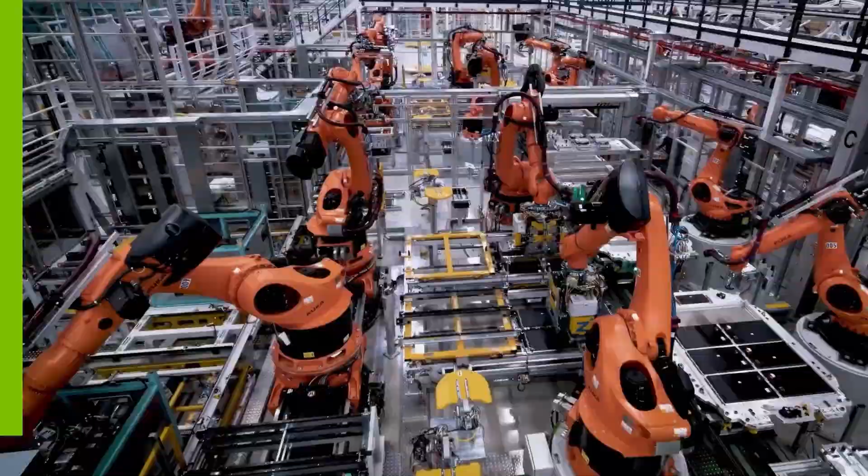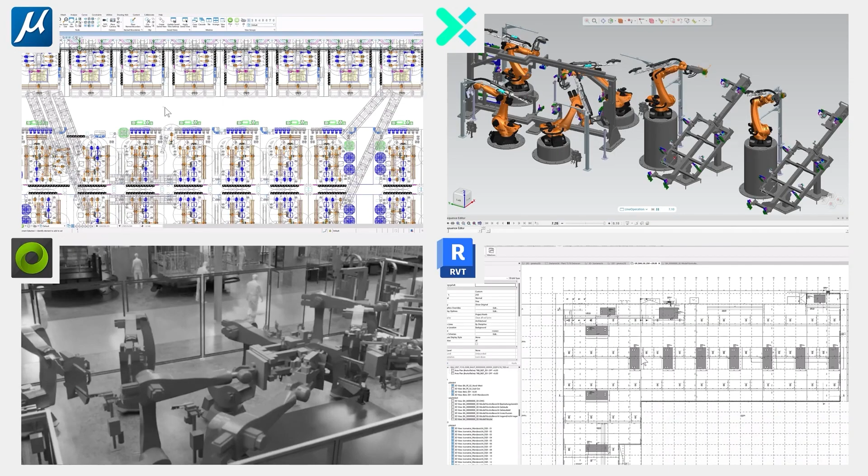There is a factory in Debrecen, Hungary, that BMW built twice. Once in the real world, with real steel and real concrete and real robots bolted to real floors. And once before that, entirely inside a computer, where nothing was real, nothing was physical, and nothing could get hurt if it went wrong. BMW built the entire factory as software first, tested it, broke it, fixed it, optimized it. Ran thousands of versions of it, and only once the digital version worked perfectly did they pour a single ounce of actual concrete in Hungary.

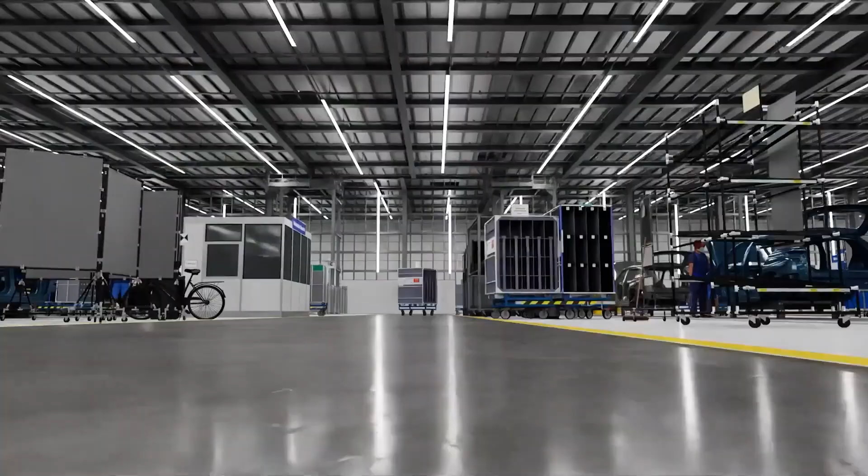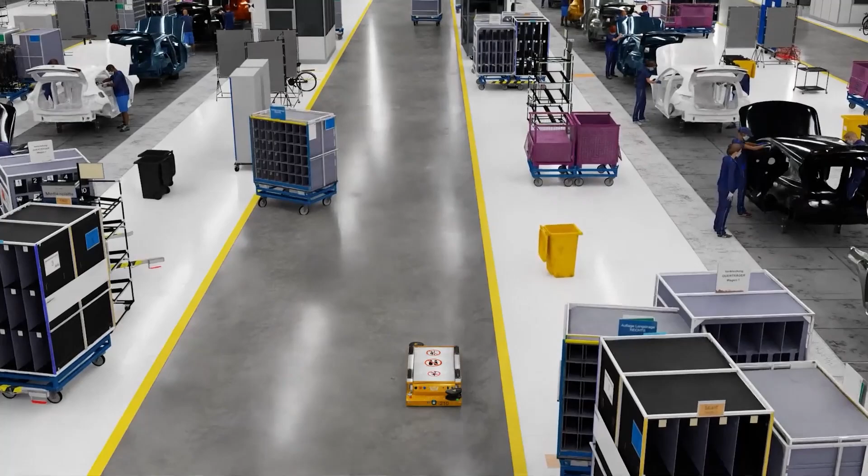That digital version is called a digital twin, and it lives inside a piece of software called NVIDIA Omniverse. And BMW is not the only one doing this. Right now, in 2026, some of the biggest companies on Earth are trying to do something that sounds like science fiction. They are trying to build a complete digital copy of the physical world - cities, factories, weather systems, even the entire planet's climate - so they can test what happens before they risk anything in reality. This is the story of the race to simulate Earth before anyone dares to change it.

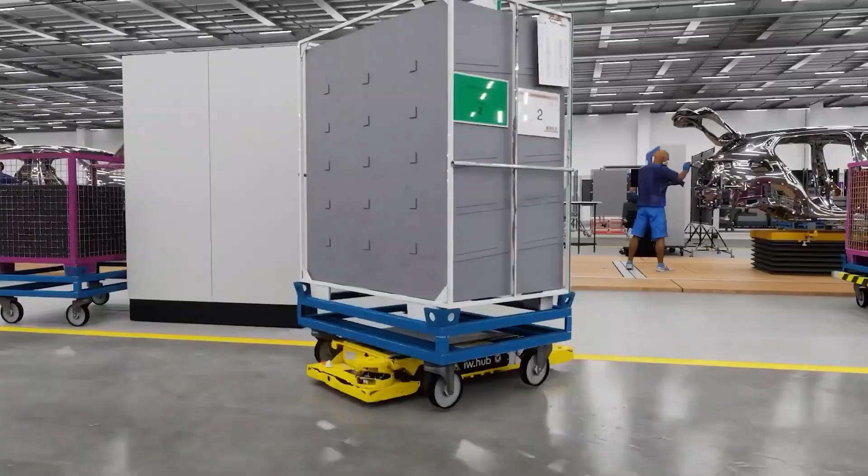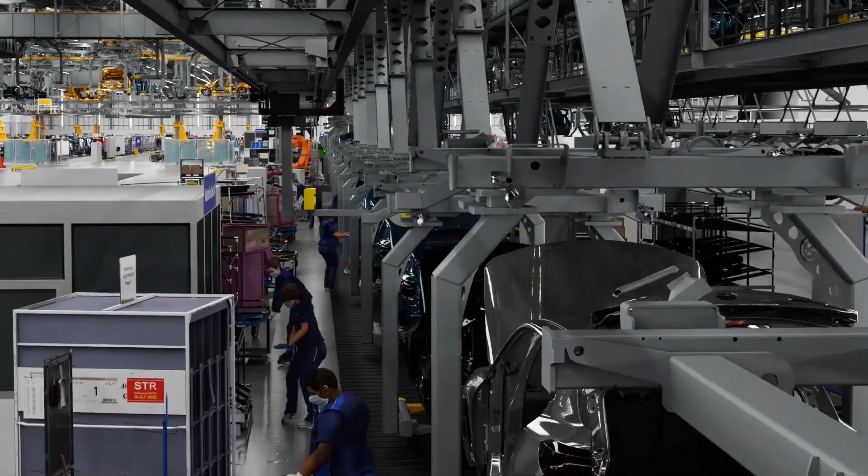Let's start with the company at the center of almost all of this, because you have heard their name before, just not usually in this context. NVIDIA. You know NVIDIA because of the chips that power ChatGPT, and Gemini, and every major AI system on the planet. But NVIDIA has a second, quieter business built around a piece of software called Omniverse, and its entire purpose is building believable, physics-accurate, digital copies of real things.

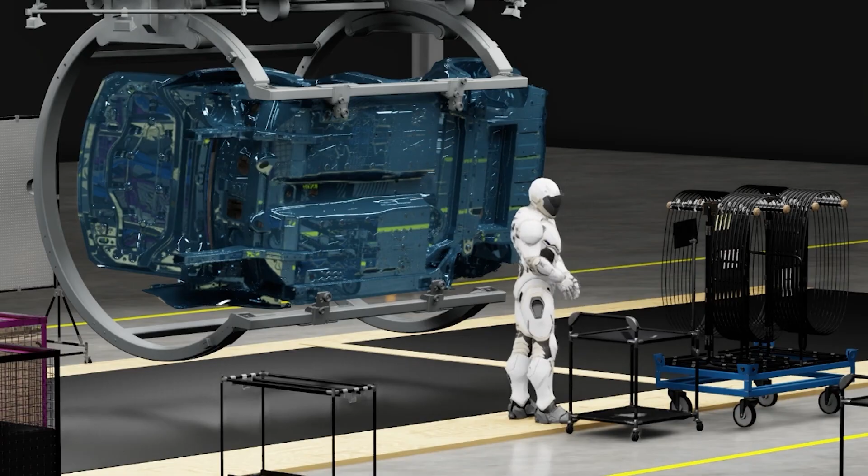Not cartoon versions, not simple 3D models like you'd see in a video game. Actual physics. Gravity behaves correctly inside Omniverse. Light bounces off surfaces the way it actually would in the real world. If you drop a virtual wrench inside an Omniverse simulation, it falls, bounces, and lands the way a real wrench would in a real factory, because the software is calculating real physics equations, not just faking the look of it.

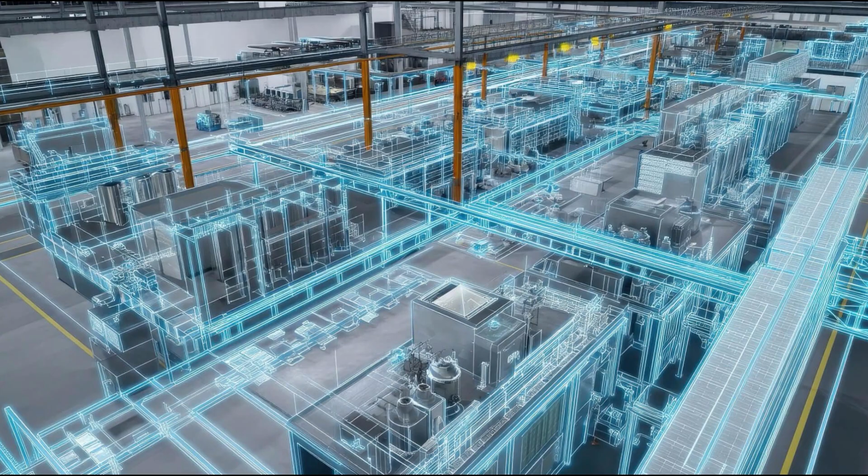NVIDIA's CEO, Jensen Huang, has stood on stage at NVIDIA's GTC conference year after year, wearing his now famous black leather jacket, explaining why this matters so much. His argument goes like this: if you are about to build something enormous and expensive in the real world - a factory, a robot, a power plant, an entire city block - wouldn't you rather make all your mistakes first inside a simulation, where a mistake costs you nothing but a little bit of computing time, instead of making those same mistakes with real steel, real money, and real human safety on the line?

That idea is not new. Engineers have used simplified computer models for decades. What is new is how real these simulations have become, and how many of the biggest companies on Earth are now betting entire divisions of their business on getting this right.

Let's talk about the company that has gone further into this than almost anyone else, because their partnership with NVIDIA is the clearest example of what this actually looks like in practice: Siemens. Siemens is a massive German engineering company over 175 years old, the kind of company that builds trains, medical scanners, industrial software, and entire power grid systems - the sort of company most people have heard of but couldn't quite explain what it actually does. In 2025, Siemens and NVIDIA stood together on stage at NVIDIA's GTC conference in Washington, D.C., and showed off something they are calling the Industrial Metaverse - a shared, physics-based digital space where factories can be designed, tested, and run entirely in software before anyone builds anything real.

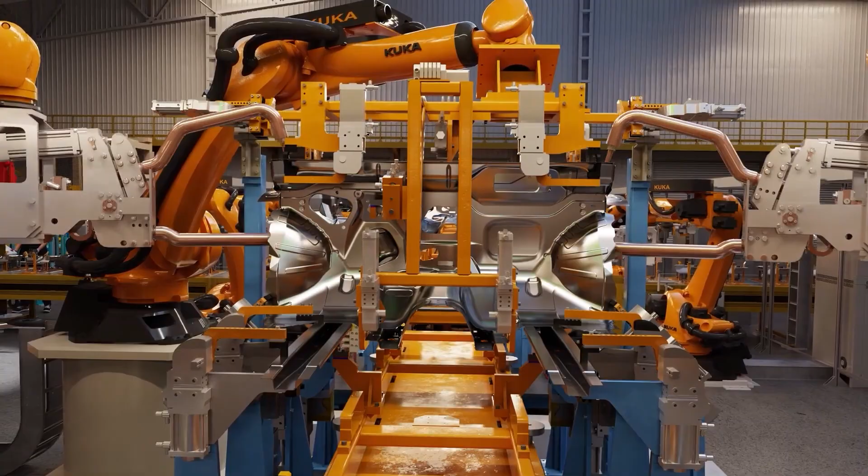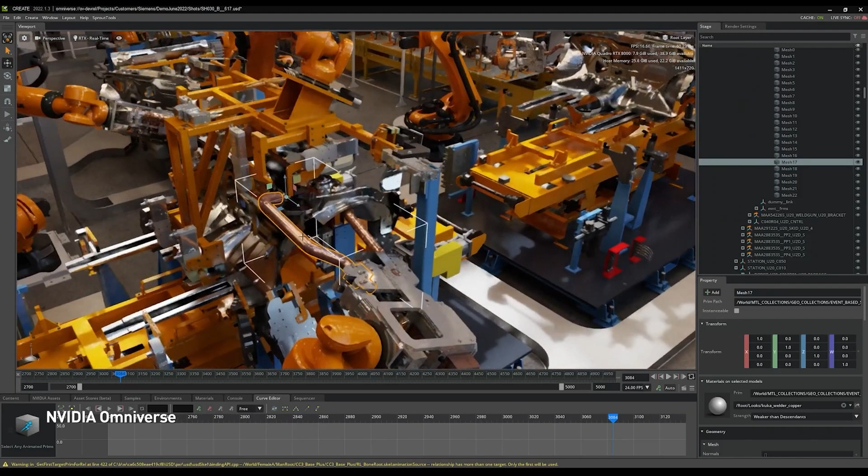The way it actually works is genuinely wild once you see it. Engineers use Siemens software to design a factory, laying out where the robots go, where the conveyor belts run, where human workers will stand. That design gets fed directly into NVIDIA Omniverse, where it becomes a fully realistic, physics-accurate 3D environment. And then, using artificial intelligence, the system can automatically generate and test hundreds of different possible layouts for that same factory, all at once, all inside the simulation, looking for the one that is fastest, safest, and most efficient, long before a single wall goes up in the real world.

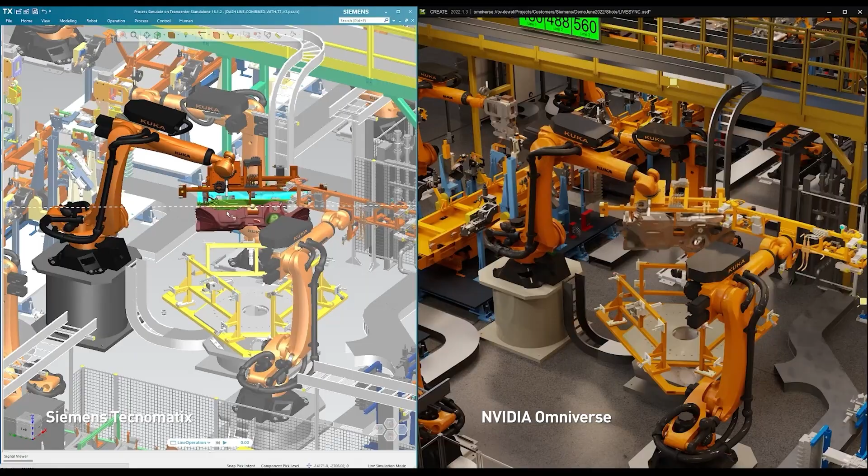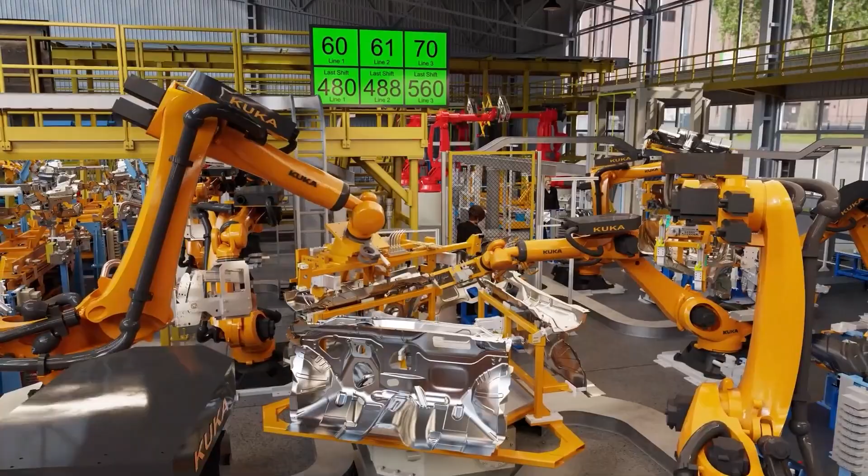Siemens showed this off with something called Digital Twin Composer, launched at the CES trade show in Las Vegas in January 2026, which lets a company connect that photorealistic simulated factory to real, live data streams once the actual factory gets built. Meaning the digital twin does not stop being useful once construction finishes. It keeps running, forever, right alongside the real one, constantly comparing what is supposed to be happening against what is actually happening on the real factory floor.

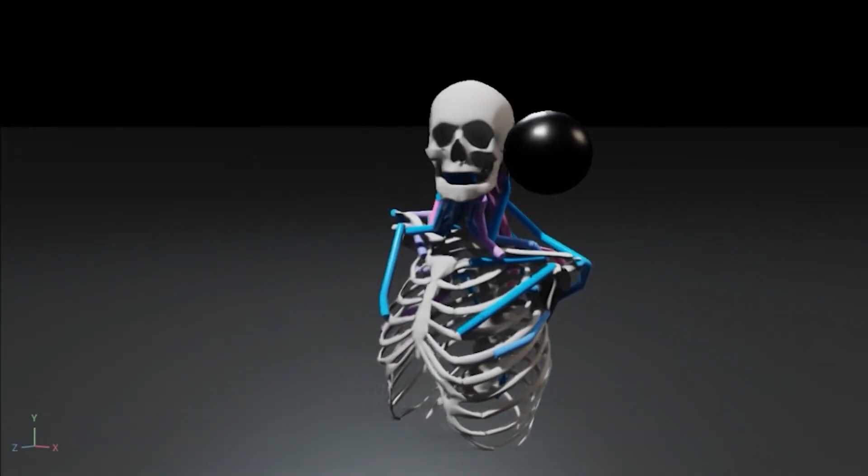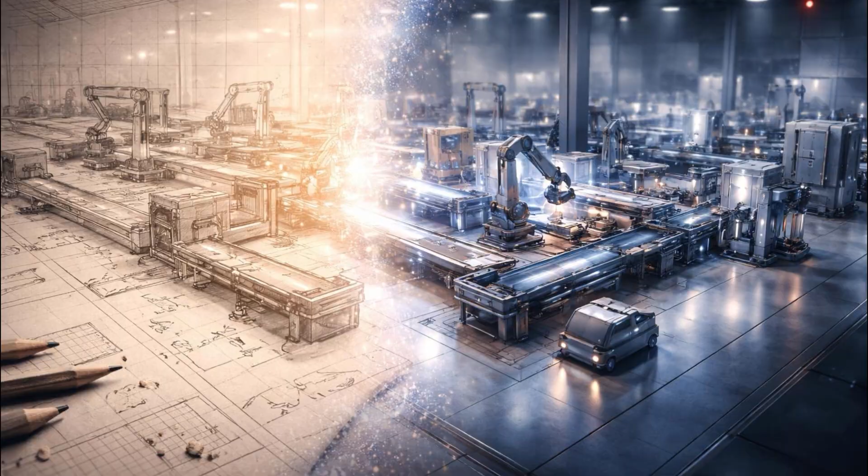Rev Lebaredian, the NVIDIA vice president who leads the Omniverse team, described the goal simply: engineers can validate an entire product's lifecycle, from design all the way to factory logistics, entirely in the virtual world, before committing a single atom to the real one. Before committing a single atom - that is the whole philosophy in one sentence.

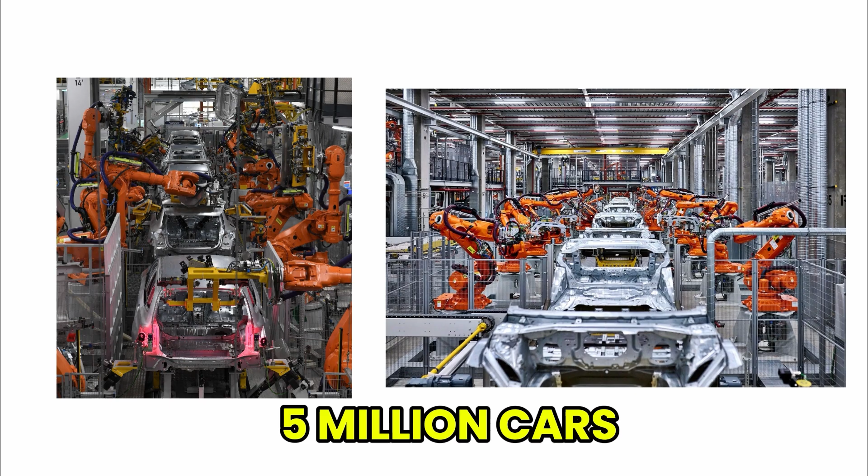Now let's talk about the company that has probably pushed this idea further than any other single business on Earth, because their digital twin story is almost unbelievable in scale. BMW produces about 5 million cars every single year, and because customers can customize nearly every single one of them, the manufacturing challenge is enormous.

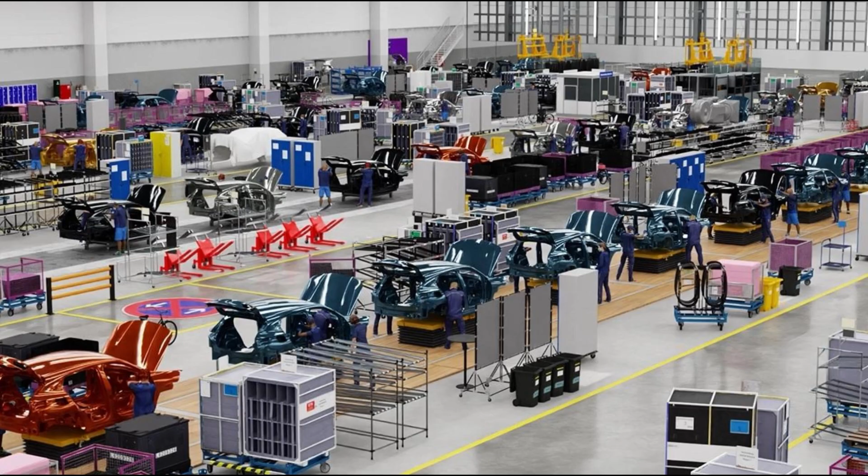Coordinating robots, human workers, parts and logistics across more than 30 factories located all over the world, BMW calls its version of this system the virtual factory, and it now spans over 1 million square meters of simulated factory space, roughly the size of 140 football fields, all existing first inside NVIDIA Omniverse before any of it exists in physical reality.

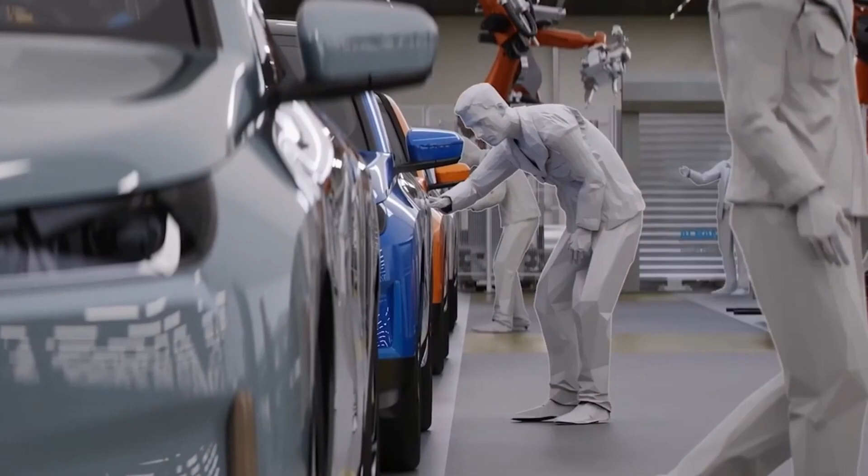When BMW built its new electric vehicle plant in Debrecen, Hungary, planners built the entire factory virtually first, testing robot movements, testing human workflows, testing how parts would flow through the building, running collision checks to make sure robotic arms wouldn't crash into each other or into human workers.

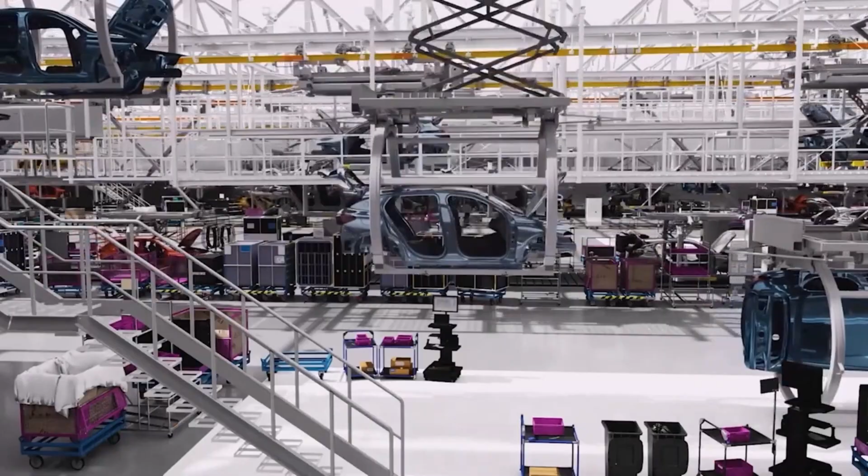All before a single piece of actual factory equipment was installed. BMW says this approach has reduced production planning costs by up to 30%, and it has cut down dramatically on the kind of expensive, embarrassing mistakes that used to only get discovered after a real factory was already built and running. Milan Nedeljkovic, a board member at BMW responsible for production, called this shift a huge leap forward, opening up completely new perspectives in how factories get planned.

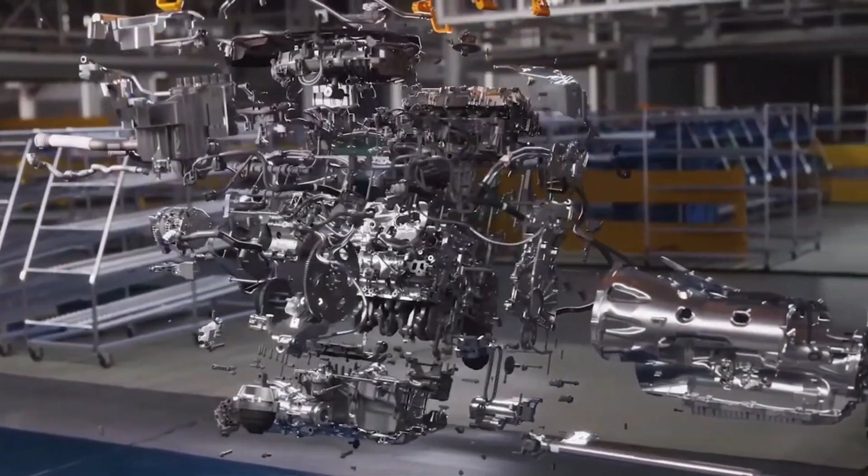Here is the old way this used to work, the way it worked for basically all of the 20th century. You design a factory on paper, or later on a basic 2D computer screen. You build it in the real world based on your best guess, and then you discover the problems.

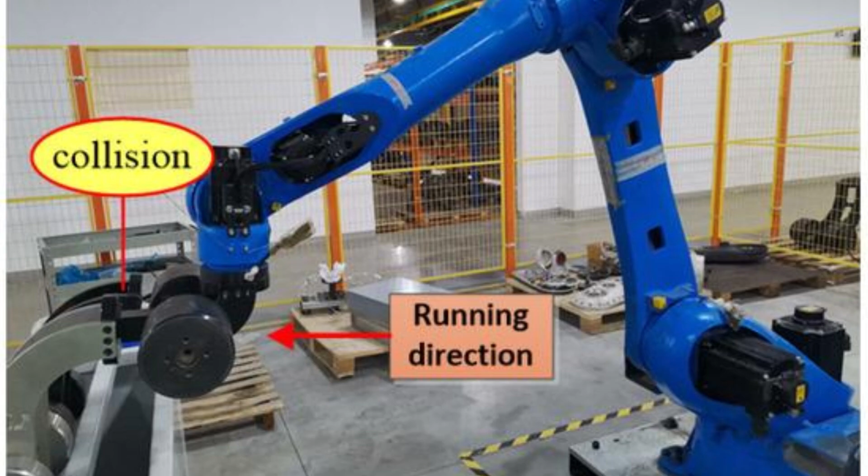The robot arm that swings just a little too close to where a human worker needs to stand. The conveyor belt that creates a bottleneck nobody predicted. The delivery truck route that turns out to be too narrow for the trucks BMW actually uses. Under the old system, you find out about these problems after the concrete is already poured, after the robots are already bolted down, after millions of dollars are already spent.

Under the digital twin system, you find every single one of those problems months or years earlier, while it still only costs you computing power to fix instead of real construction crews tearing out real walls.

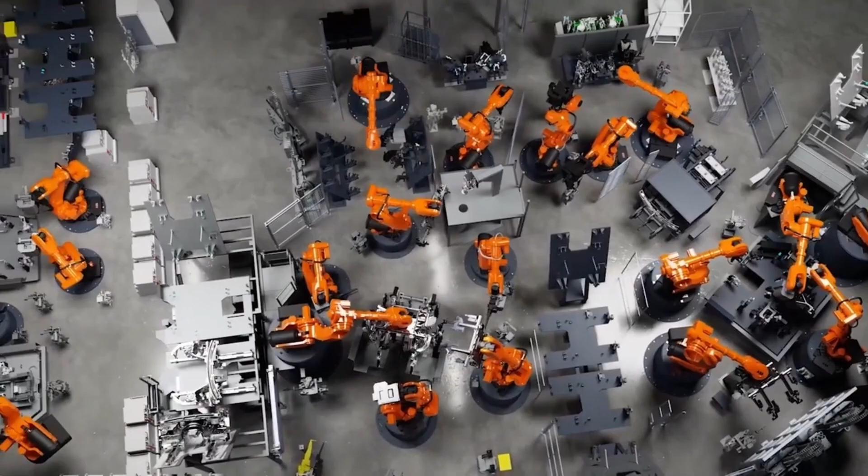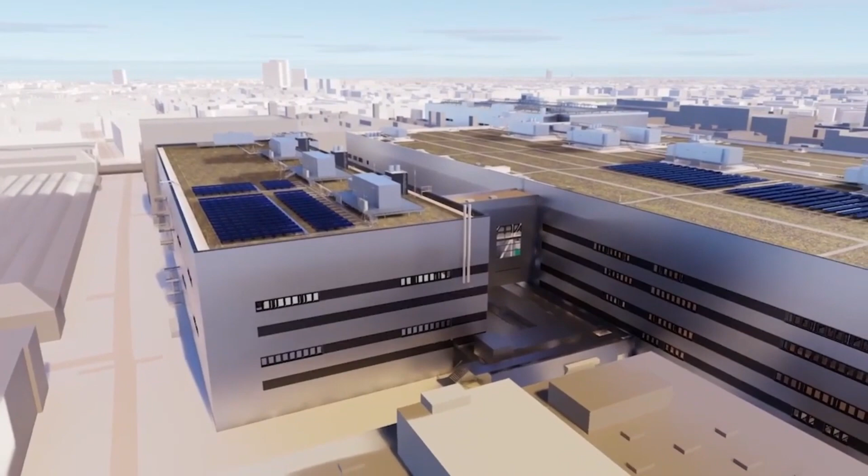Now let's zoom out even further, because factories are actually just the beginning of this story. The most ambitious version of this idea is not simulating one factory. It is simulating entire cities and eventually the entire planet. NVIDIA has a project called Earth 2, and the goal is genuinely as big as it sounds: an interactive, AI-powered digital twin of Earth's entire climate system.

The idea traces back to a European Commission project launched in 2021 called Destination Earth, which set out to build a full simulated digital twin of the planet's climate so that governments and researchers could ask questions like, what happens to this coastline if sea levels rise by a certain amount? Or how will this specific city be affected by a hurricane forming 3 days from now? And get real, physics-based answers instead of rough guesses.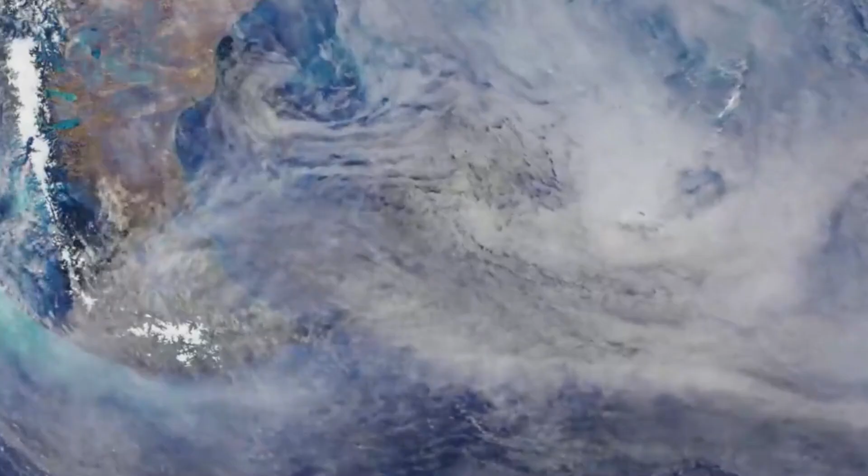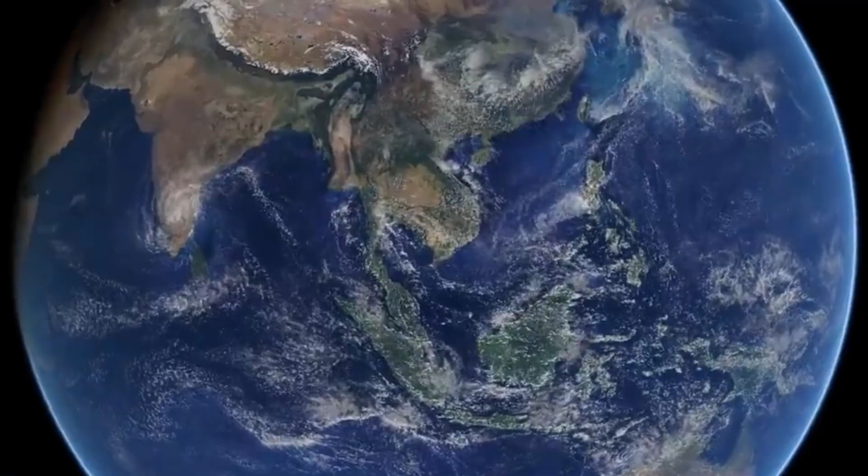NVIDIA's version, Earth 2, uses AI models to speed up something that used to take enormous amounts of computing time. Traditional weather forecasting, the kind that powers the weather app on your phone, relies on solving enormous physics equations across the entire atmosphere, which takes powerful supercomputers hours to calculate. Earth 2 uses AI trained on those same physics principles to generate similarly accurate forecasts dramatically faster, which matters enormously when the thing you are trying to predict is a hurricane that might make landfall in a matter of days.

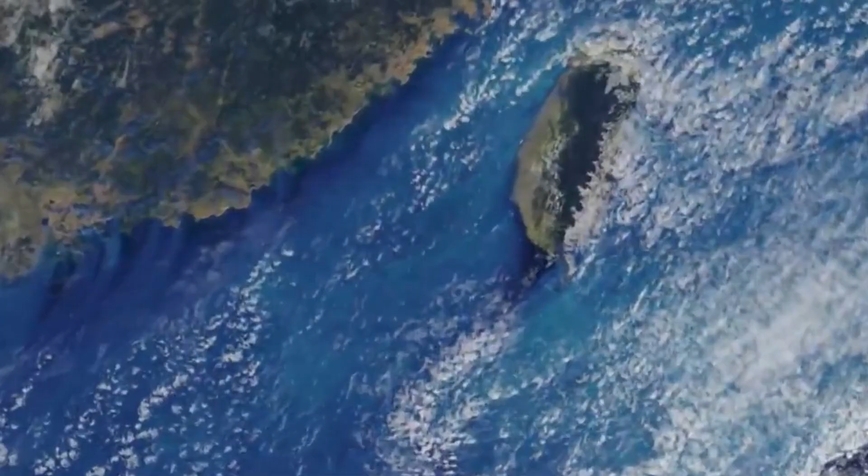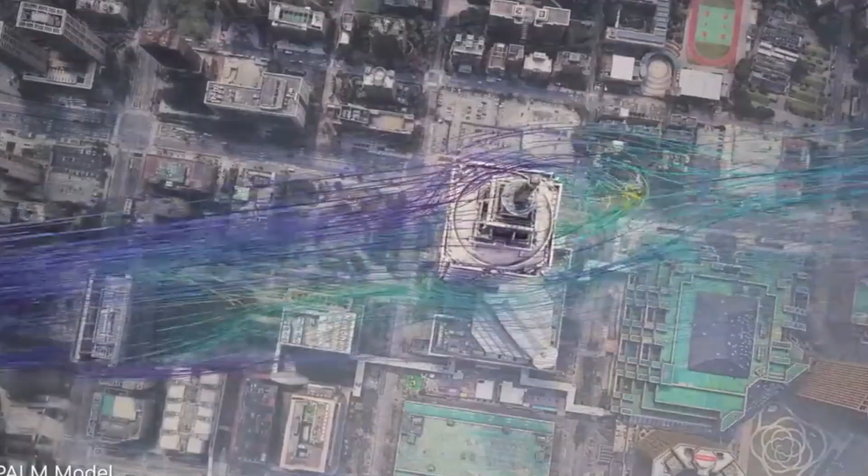And Earth 2 is not stopping at global weather. NVIDIA has been expanding it down to city-scale simulation, combining high-resolution weather and climate data with realistic 3D city models so that urban planners can ask very specific local questions. If we build a new building on this particular street corner, how does that change wind patterns and heat buildup in this specific neighborhood 3 blocks away during a heatwave?

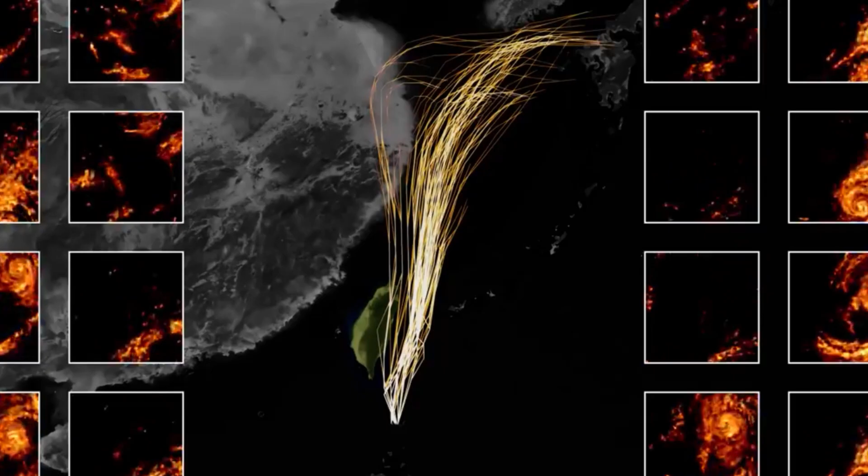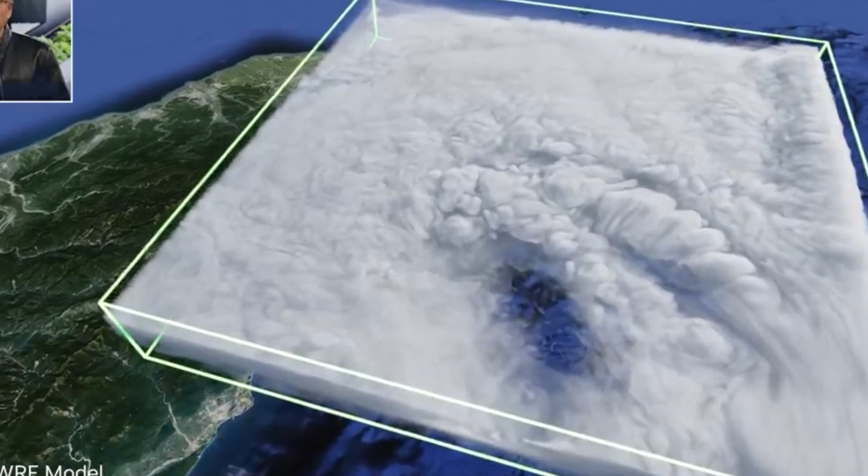That is not a hypothetical question anymore. That is the kind of question cities are starting to actually ask their digital twins before they approve real construction permits. And this same basic idea is now reaching into places you would never expect.

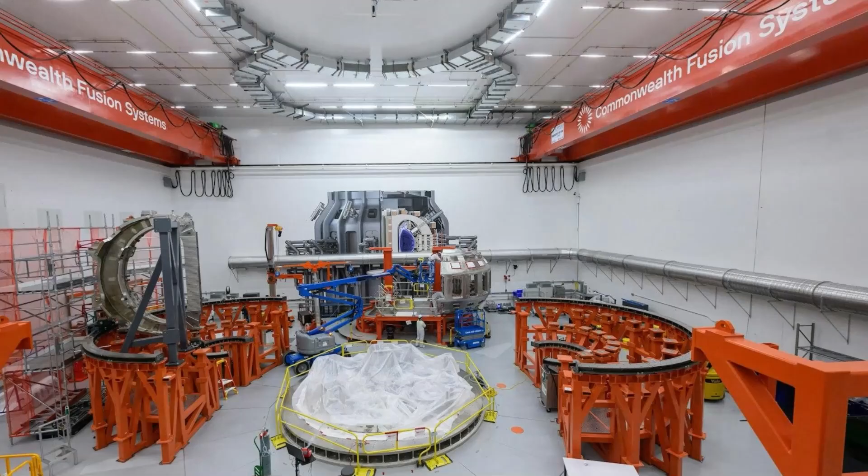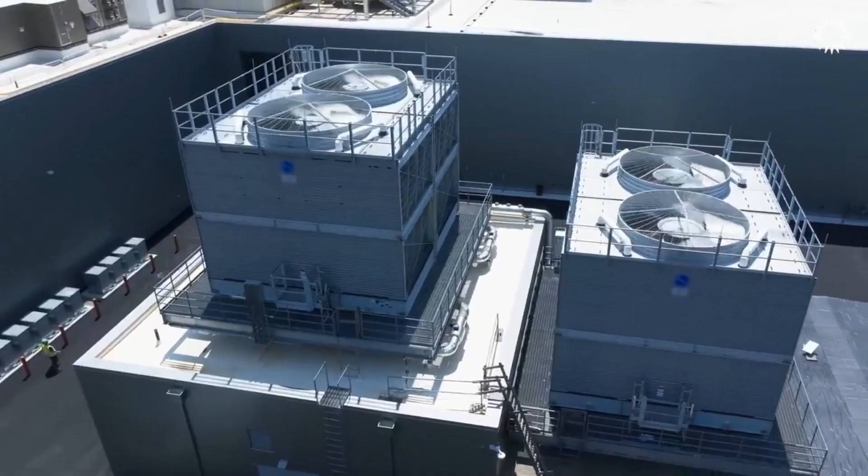Which brings us to one of the strangest and most important digital twin projects happening anywhere on Earth right now: nuclear fusion. A company called Commonwealth Fusion Systems, based in Devens, Massachusetts, is trying to build something called the SPARC Fusion Reactor, an attempt to create the same kind of energy reaction that powers the sun here on Earth in a controlled way, something humanity has been chasing since the 1950s without ever fully succeeding at commercial scale.

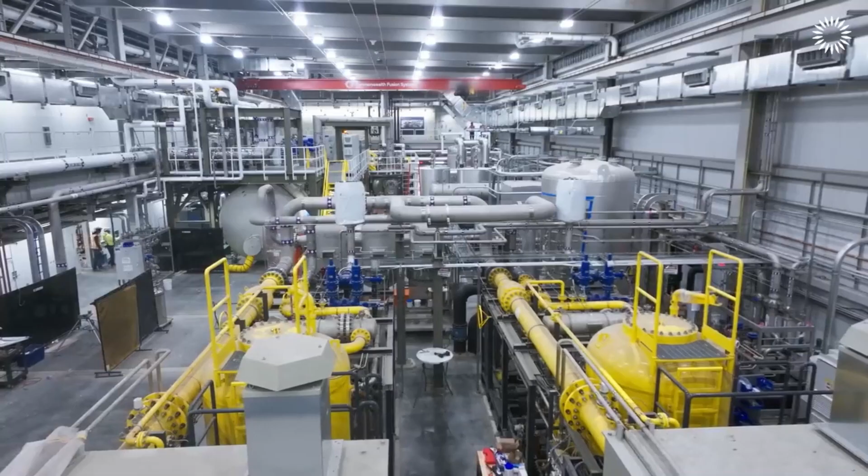In early 2026, Commonwealth Fusion Systems announced a partnership with both NVIDIA and Siemens to build a complete AI-powered digital twin of the SPARC reactor itself.

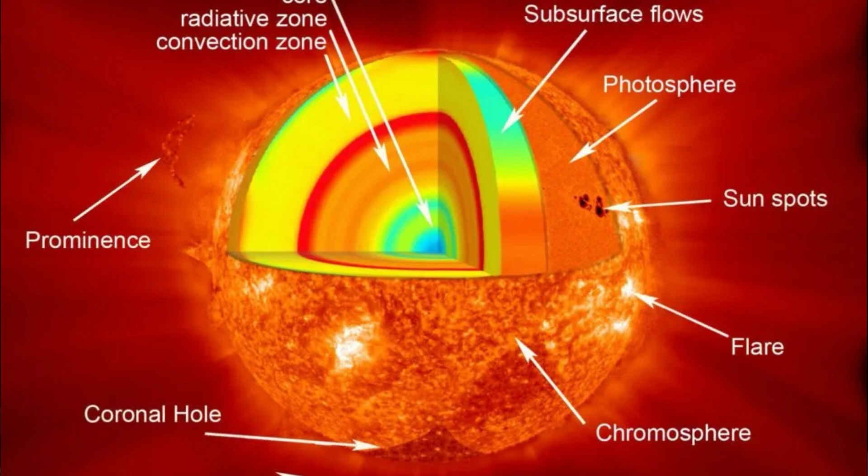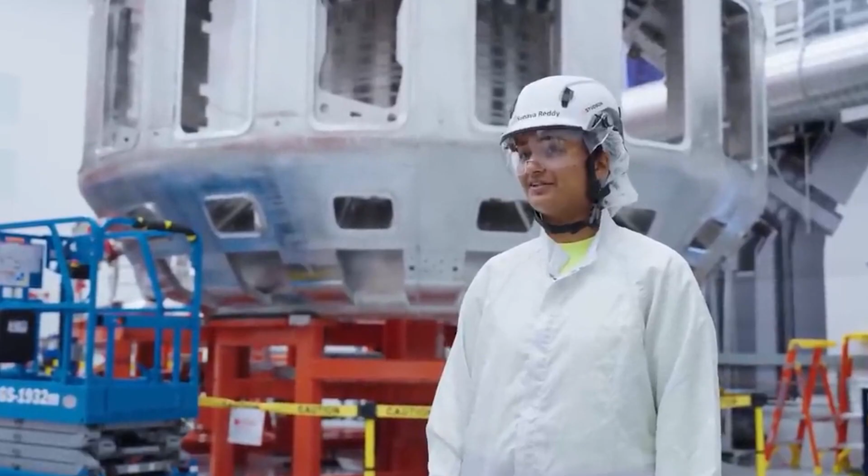Fusion reactors involve some of the most extreme physical conditions humans have ever tried to control. Plasma heated to temperatures hotter than the core of the sun, contained by powerful magnetic fields that have to be precisely calibrated in real time. Getting any of that wrong in the real world is not like a factory robot bumping into a wall. It is genuinely dangerous and genuinely expensive to test through trial and error.

So instead, engineers are building the entire reactor first inside a digital twin, integrating design data, manufacturing data, and operational data all inside Siemens and NVIDIA's combined platform, so they can simulate how the plasma will behave, how the magnets will respond, and how the entire machine will operate before they risk it in the real physical machine sitting in that factory in Devens, Massachusetts.

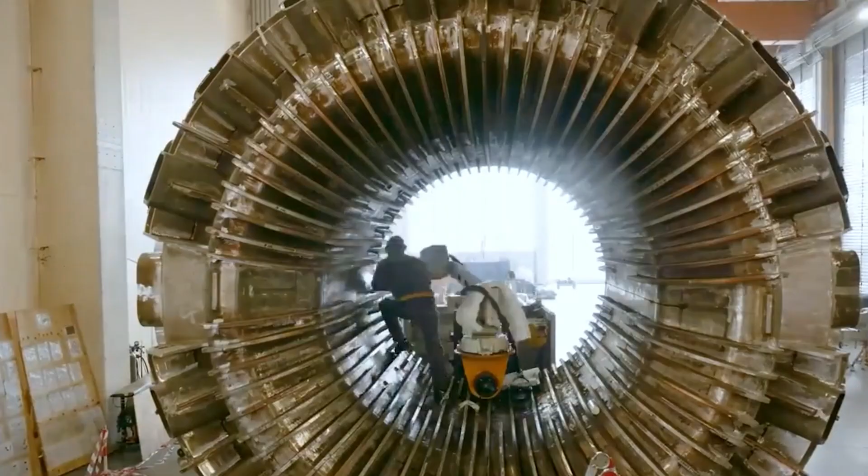If you want one example that shows exactly how seriously the world is now taking this idea of simulate first, build second, it's a group of engineers trying to recreate the power of the sun, choosing to test it inside a computer before they test it inside a magnetic bottle.

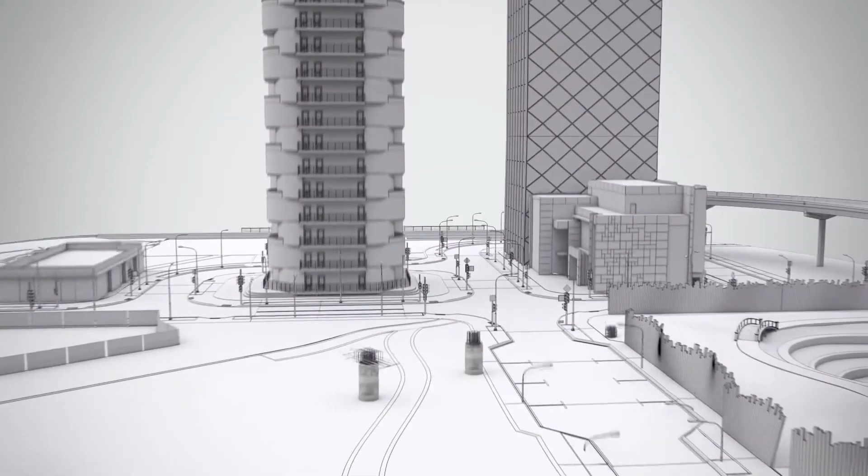Now let's talk about why all of this actually matters beyond just being an impressive piece of technology. Because there is a real, serious argument for why this approach could change how humans build almost everything going forward. Think about how much of human history has involved learning by breaking things in the real world.

Bridges have collapsed before engineers understood the physics well enough to prevent it. Factories have caught fire before safety codes caught up. Power plants have failed in ways nobody predicted until it was too late. For most of human history, expensive, sometimes catastrophic real-world failures were simply part of the cost of figuring out how to build big, complicated things.

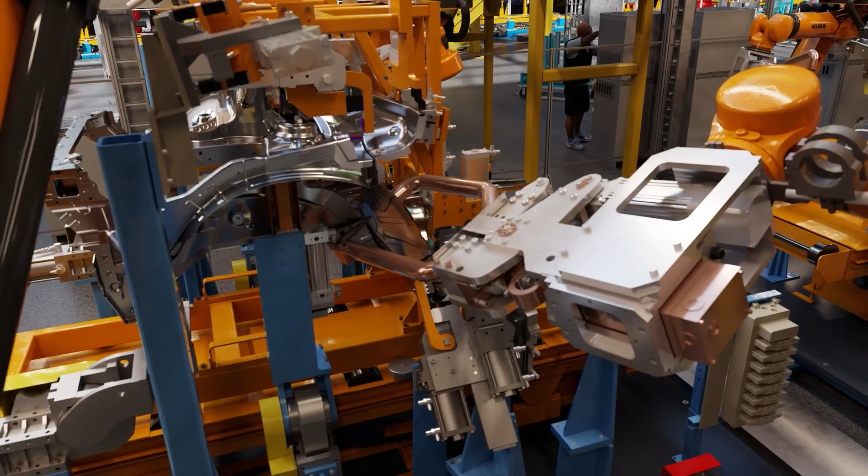Digital twins offer something genuinely different: the ability to fail thousands of times, safely, cheaply, invisibly, inside a computer, and only build the version in the real world that has already survived every failure you could think to throw at it.

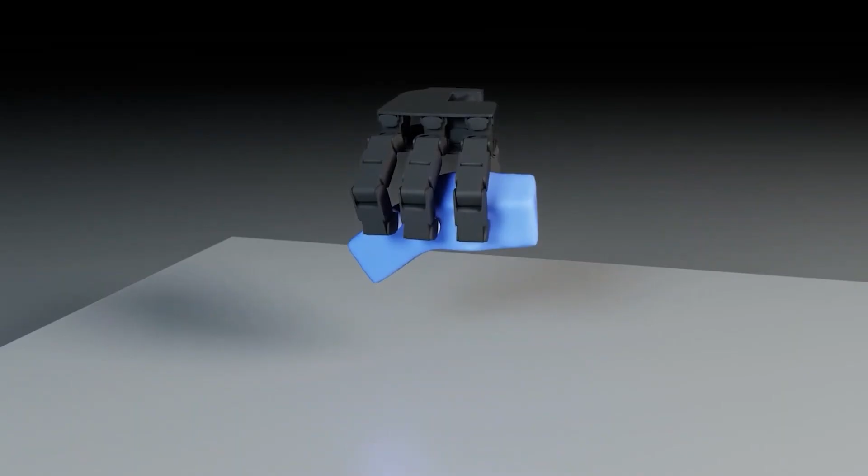Electronics manufacturers like Foxconn, the company that builds iPhones for Apple, have started using this same approach to design and simulate their own robotic factories before construction, using NVIDIA's Omniverse platform to integrate 3D data from tools like Siemens Teamcenter, testing robot movements and factory layouts entirely virtually first.

Deepu Talla, an NVIDIA vice president overseeing robotics, said it plainly at a Computex keynote demo: every factory is becoming more and more autonomous due to the transformational impact of generative AI and digital twin technologies.

And this connects directly back to something else happening right now in the world of robotics. Because those humanoid robots you've seen in videos, walking through warehouses, working on car assembly lines, almost all of them were trained first inside digital twin simulations, practicing the exact same physical movements they'll eventually perform in the real world.

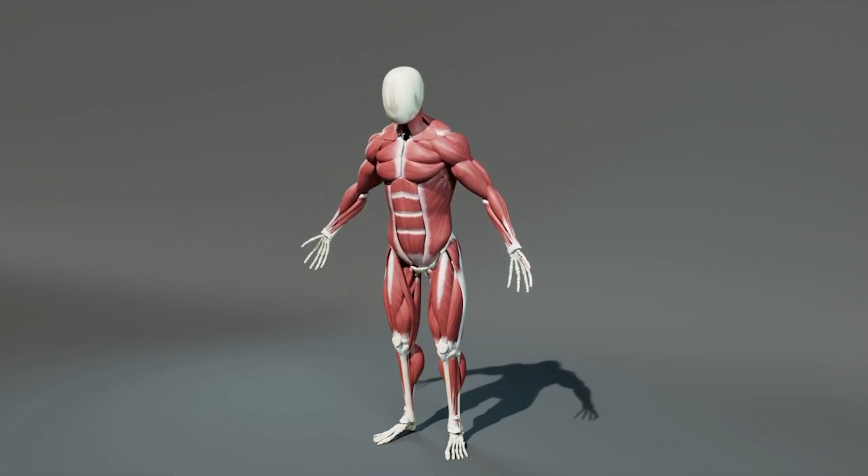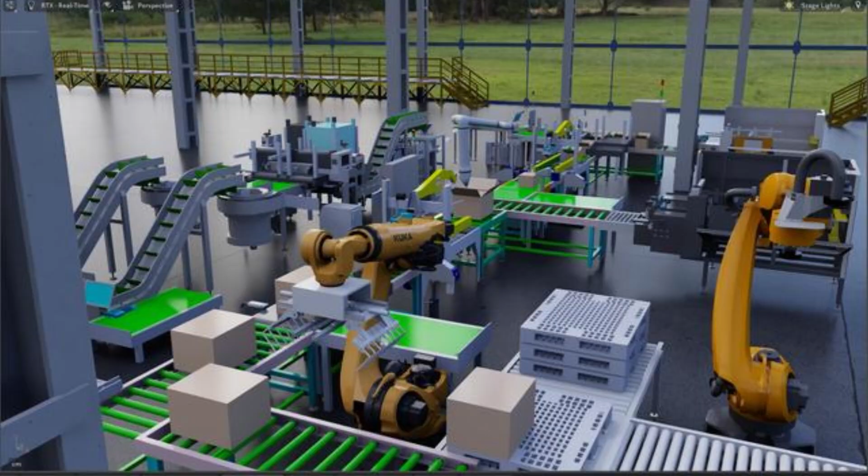Thousands and thousands of times, entirely in software, before a single real robot arm ever picks up a single real object. That is the actual reason companies can train a robot to reliably pick up a coffee cup or sort a package without spending years running trial and error tests with expensive, breakable physical machines.

They run millions of attempts inside a simulated digital twin first, where failure costs nothing, and only bring the lessons learned into the real physical robot at the very end.

So here is the honest, complete picture of what is actually happening right now in 2026. NVIDIA is trying to build the underlying platform, Omniverse, that can host physics-accurate digital copies of almost anything: a factory, a robot, a city, a reactor, even the entire climate of planet Earth.

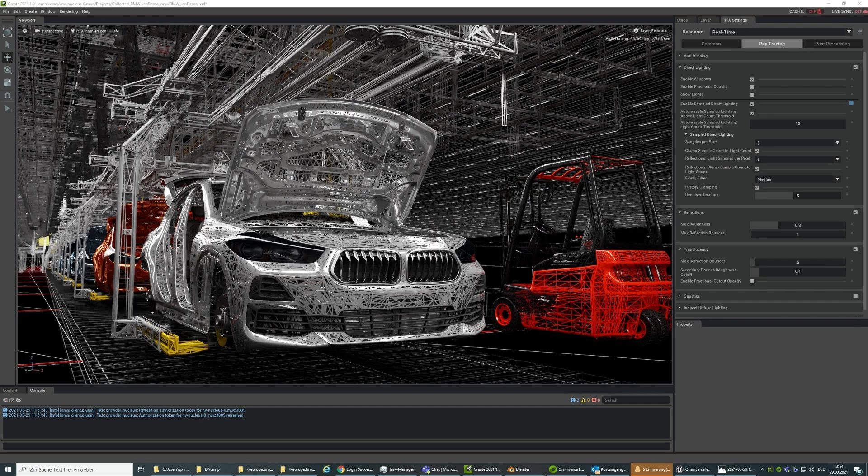Siemens is trying to be the company that connects all of the real-world engineering and manufacturing data, the actual blueprints, the actual sensors, the actual operational systems, into that platform so the digital version stays permanently linked to the real one. Companies like BMW, Foxconn, and Commonwealth Fusion Systems are the ones actually using this combination right now.

To build electric vehicle plants in Hungary, robotic factories in Asia, and fusion reactors in Massachusetts. Testing the future before they risk building it.

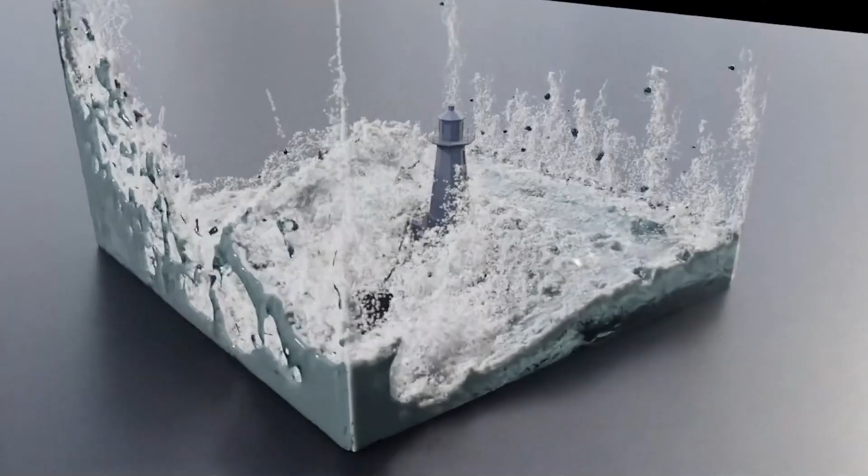And NVIDIA's Earth 2 project is pushing the exact same core idea to its largest possible scale. Treating the entire planet itself as something that can, and maybe should, be simulated before humanity makes decisions that affect it. The philosophy underneath every single one of these projects is exactly the same, whether you're talking about a single factory robot or the climate of the whole Earth.

Before you change the real world and risk the real cost, real danger, and real consequences of getting it wrong, build it first inside a copy, break it as many times as you need to, and only then, once you have learned everything a simulation can teach you, do you dare to touch reality.

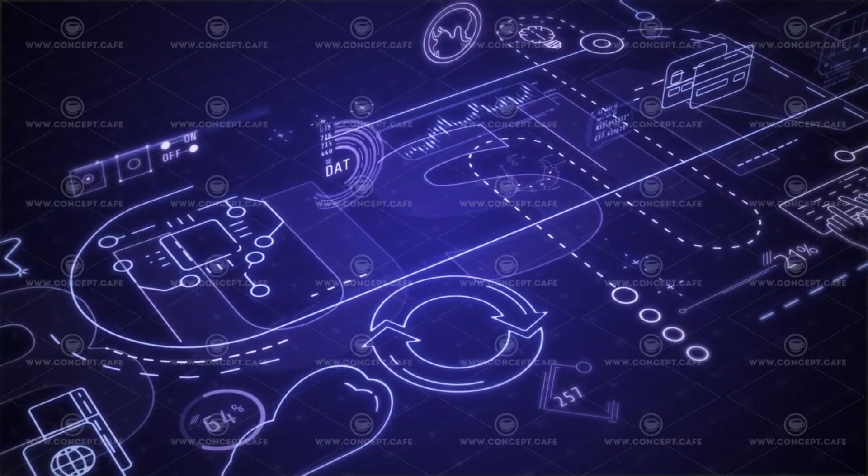That factory in Devens, Massachusetts exists today because it failed, and got fixed, and failed again, and got fixed again thousands of times inside a computer, long before a single human worker ever walked through its real doors.

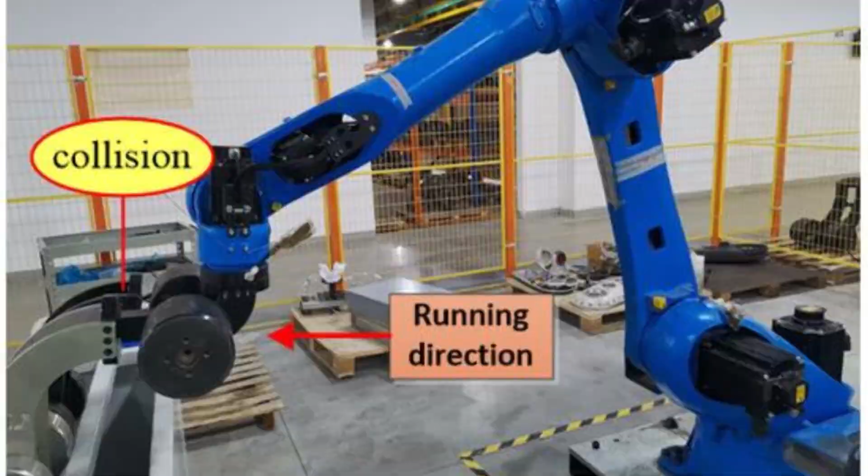And the honest, slightly unsettling truth is that this is very likely just the beginning. Because if a company can build a convincing enough digital twin of a single car factory, and researchers can build a convincing enough digital twin of a fusion reactor capable of recreating the power of the sun, the actual limit on how much of the real world eventually gets simulated first, before it's ever built, might not be a technology problem at all.

It might just be a question of how much of the world someone decides is worth simulating. And right now, in 2026, the honest answer from companies like NVIDIA and Siemens seems to be almost all of it.